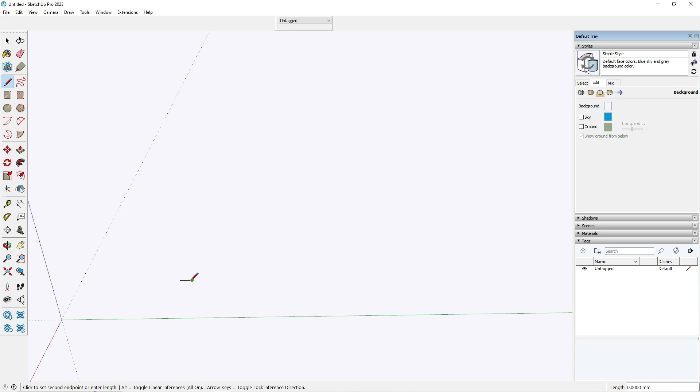Then we have one putty running through, that will be of 50 mm, we can consider. Then again we have a 900 mm wardrobe. So now depth comes around 600 or 2 feet. Similarly here.

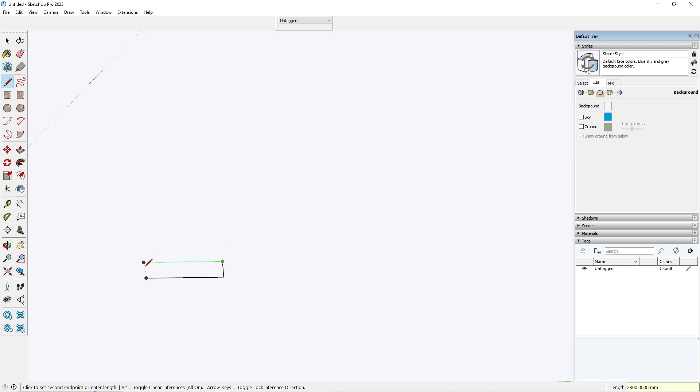So zoom in to have a straight line. I think we have got a mistake over here. That's okay, top view.

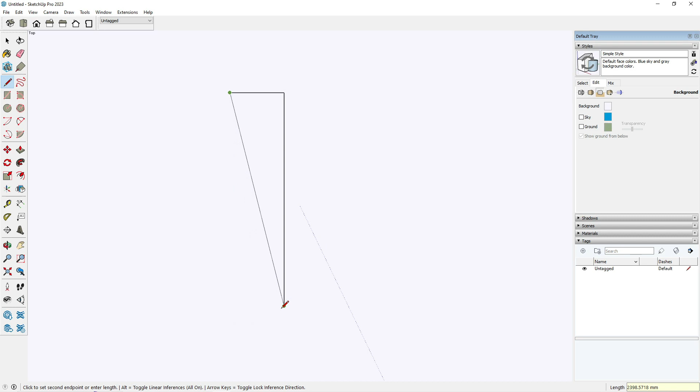So then we will have the wardrobe depth, that's a standard depth. So once it is done, we will group it. So now you can see we have to extrude this. So let's have a standard height of 7 feet.

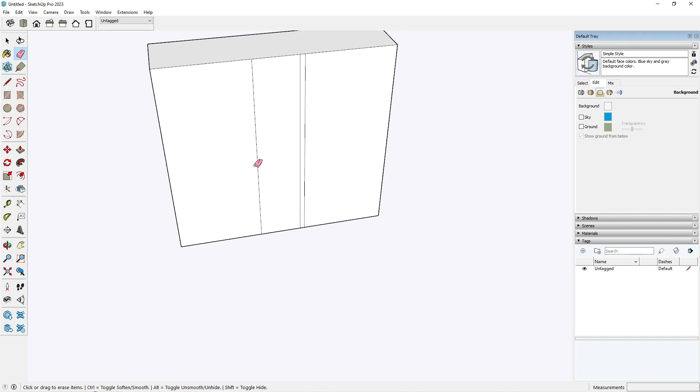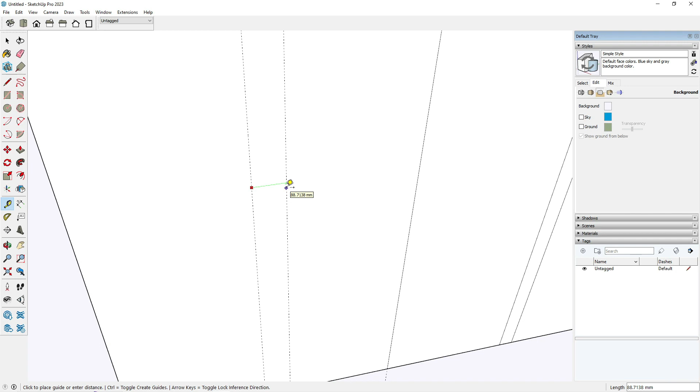So now what we have to do here is we need to add grooves. So let's consider around 450 one shutter, then 450 one more shutter. So if you see in the image, we have a small line or a groove going through near the doors. So for that we'll be adding in between to give that realistic look, a groove in between.

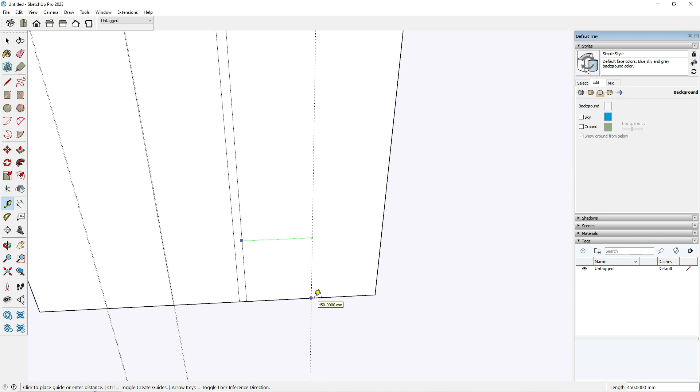So similarly to this, so you can see these grooves which I've put in between are of 4 mm. You can see in the measurement display below on the right side bottom corner it is showing 4 mm. So similarly I'll be doing it for the white color set of wardrobe.

So you can also use SketchUp for a lot of things without having extensions. You can model without having extensions.

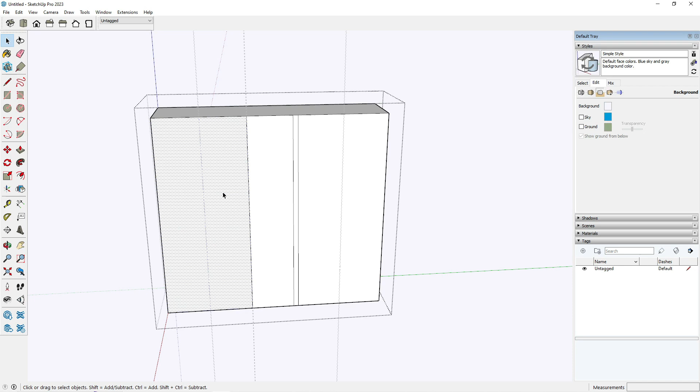So now we'll be having in the image, if you see, we have a putty running over the wardrobe completely from end to end. So to get that, we'll be needing one, easy to use offset always in this. So before that, I'll just erase this line, which will make me easy to just...

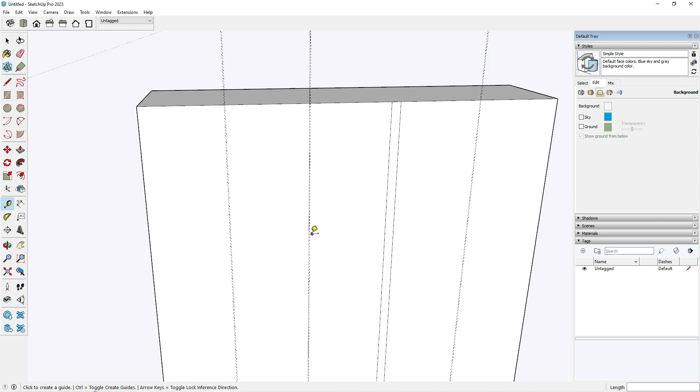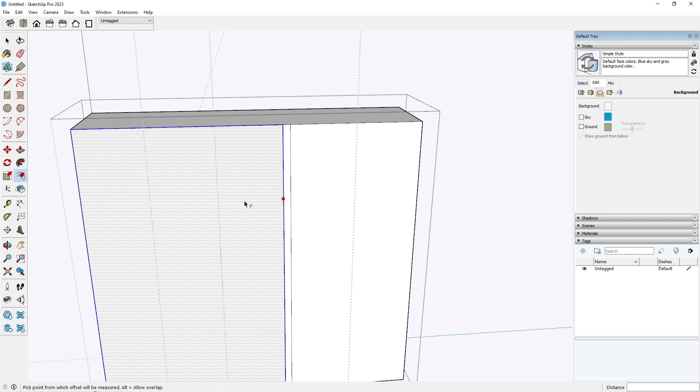Okay. Now here I'm going to use offset of 50, and here as well, of 50. So here it has become 5 probably. So let's make it as 50. Over here also 50. So since we have already done over here, so I won't be needing this on this. So let's connect this to here.

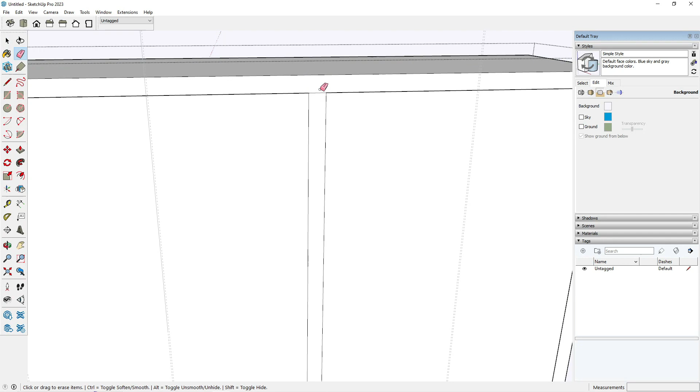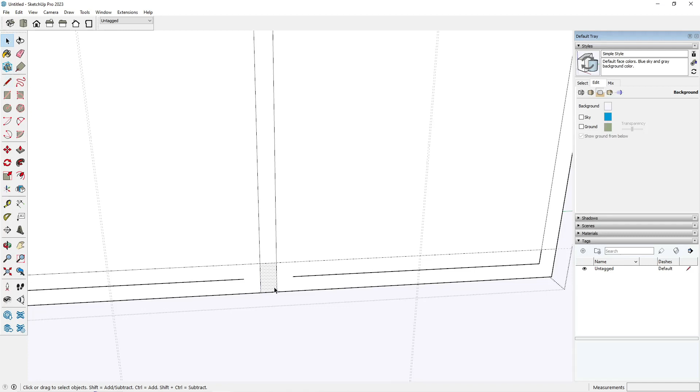Okay, we want skirting from down of 100 mm, that is 4 inches. Now here we'll be joining this down. This line will run throughout, and this also, as per the image, it cuts off.

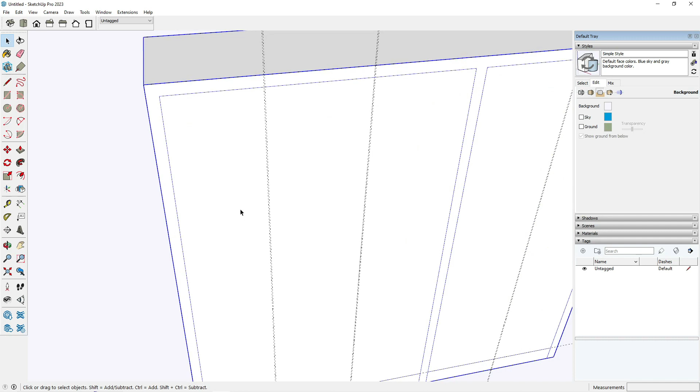Then we're going to draw doors. If you see, this is grouped, so then we are going to draw the doors.

So this will be one door, and this one will be two. By using the rectangle tool, you can draw easily. There are some designers who use the pencil tool, which takes a lot of time. Just use the rectangle tool.

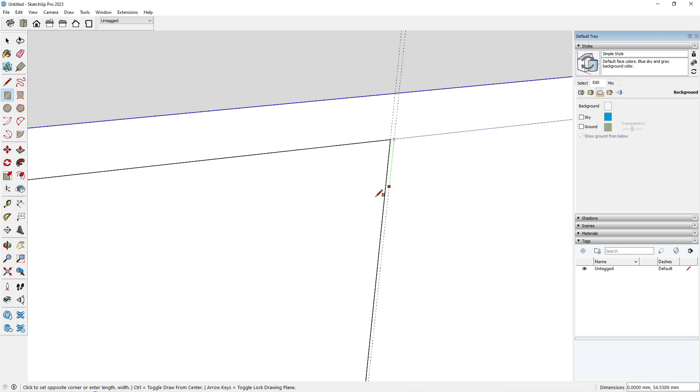Once you've put the markings in with the tape tool, use the guide lines to make it easy. Then we'll just extrude it out by 18 mm. Similarly, I'll double click this since SketchUp remembers its last entered value, and I'll be adding this over here.

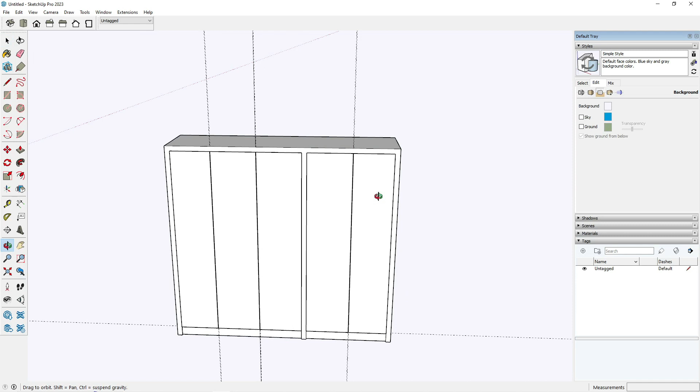Now if you see, our doors and the wardrobe are ready. This is the image shown in the reference image. So similarly, now I'll be adding the handles.

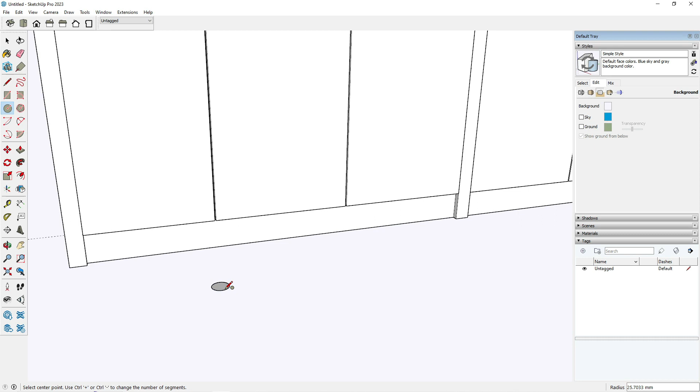To do the handles, in the image it's simple, just a circle. So I'm just going to randomly put a small circle and pull it up to around 1000 mm.

So let me group all this. Let's group all the doors so that we don't mess up when adding things. Similarly, for all the components which are not grouped, ensure that they are grouped.

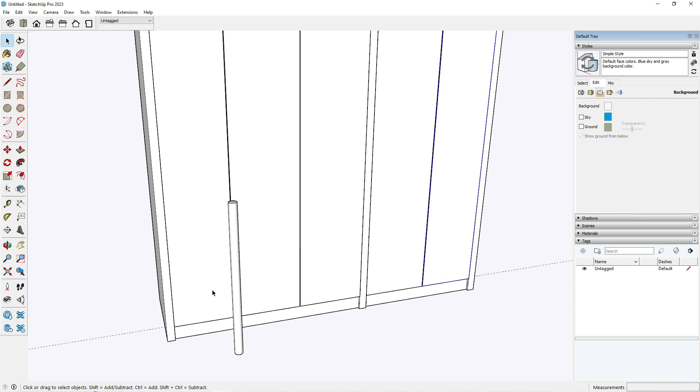Now let's mark the handle. Just take the center of the wardrobe and place this around here.

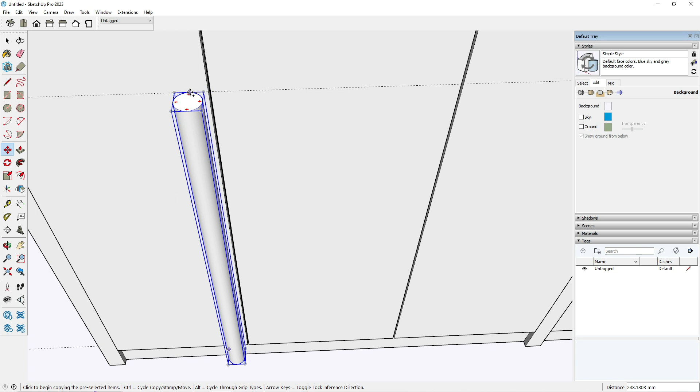Similarly, I'll be copying it around here as well, and I'll copy this one more over here as shown in the reference image. Same over here.

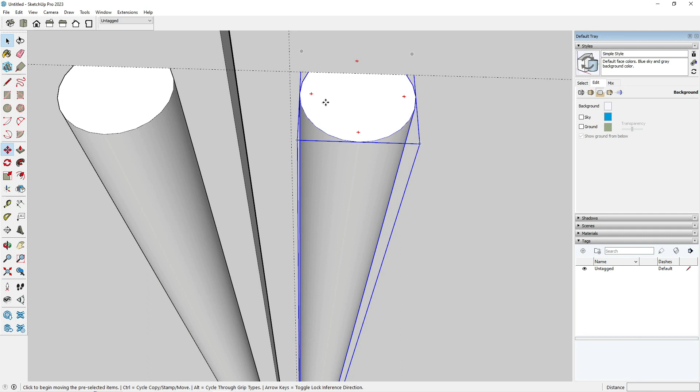You can leave around a 50 mm or 25 mm gap if you want the image to look as realistic. Usually they leave handle gaps around 50 to 75 mm while placing the handles on the wardrobe, from the shutter to the handle lock or the knob.

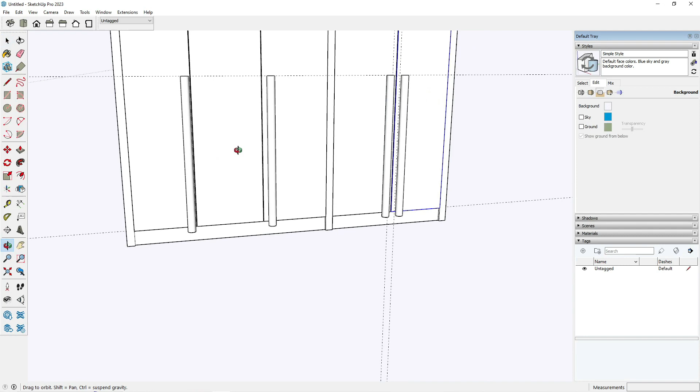So now here we are missing one, let's add one more here. Let's do the same here so we can get the output looking realistic.

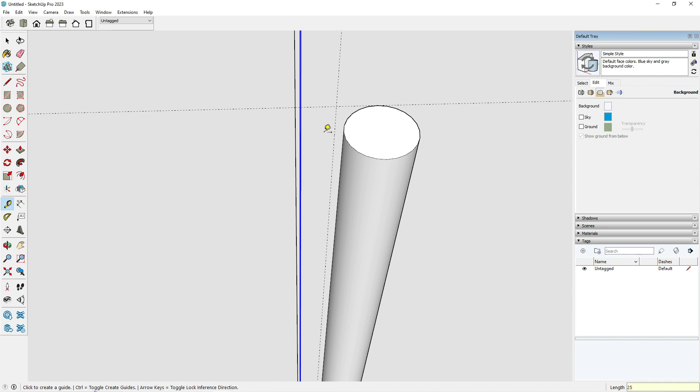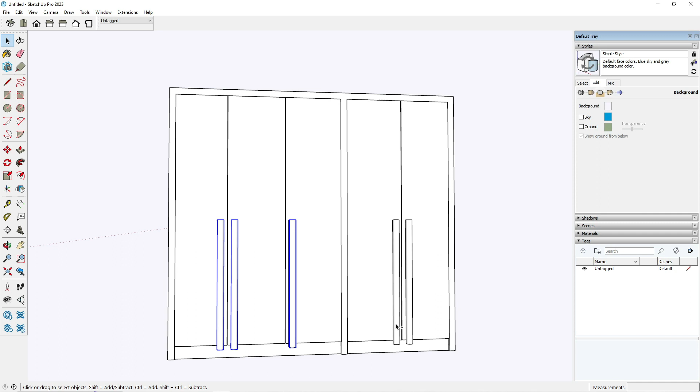So let's add colors as well. If you see in the image, these handles don't touch till the shutter's end, so we'll just scale it above to ensure it looks more realistic, as shown in the image.

Let's add the colors. For that we'll go to materials. I've already downloaded a wooden texture for the sides of the wardrobe carcass, so I'm just going to add that.

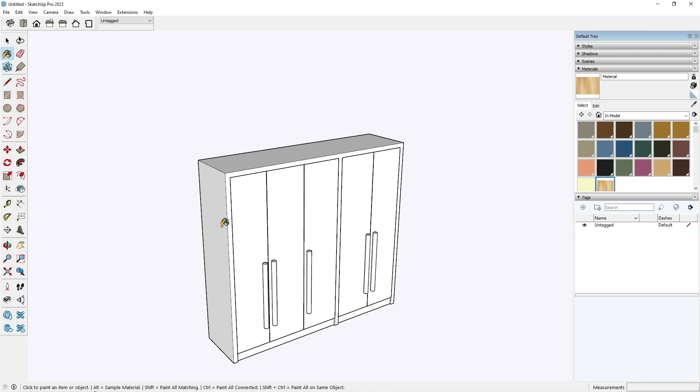For the time being, I'm going to add it and scale it around 600, and this one as well.

A similar color will be applied on the handles as well, as shown in the image. Then on the shutter, we'll be needing colors. So go for materials, then you can choose colors.

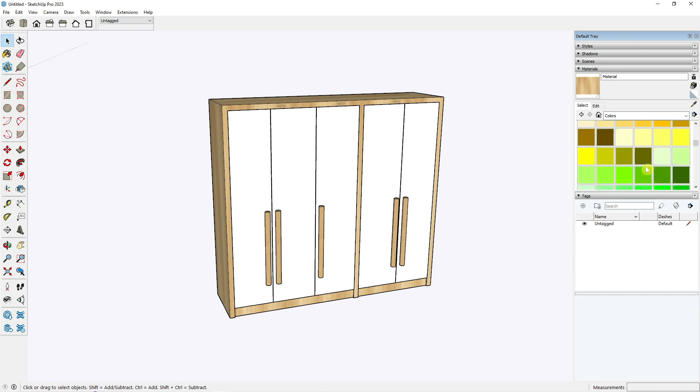So one is white. Now you'll be thinking this is already white, but if you use a picker tool and pick, there is no material in this. As of now we can see it is white itself, but when using any render engine, it's a bit difficult to get that perfect output.

So just add white over there, and we're going to add gray. Now if you see the image, we have done this. This is how you design without using any extensions.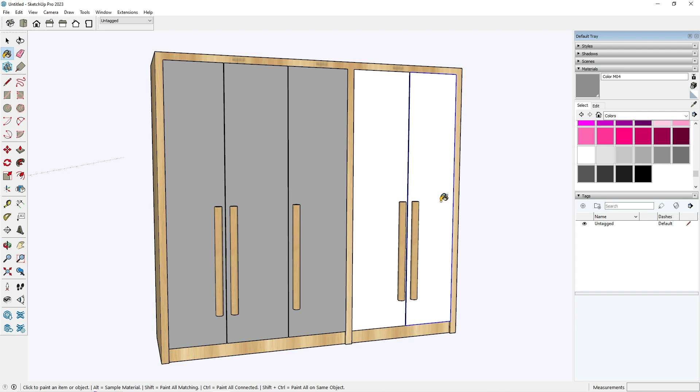Just use the tools given by SketchUp. I'll be posting more tutorials on various furniture designs and models, showing how you can design without extensions, so it will be easy for you to use on any system.